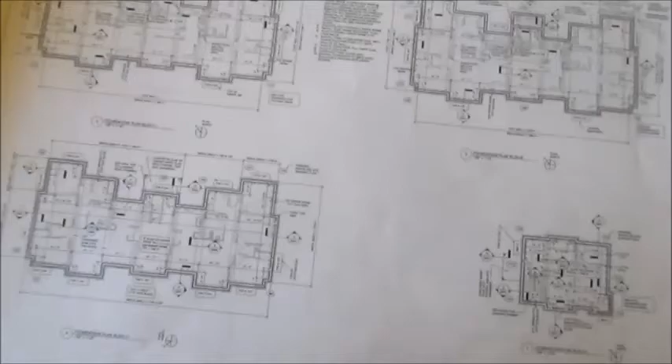We're going to continue to look at the structure of our Thurston Ave apartments. We are going to look at foundations today on page S101. Remember, S is for structural drawings, and these are the foundation plans for all 4 buildings. I'm going to run over here to the foundation plan for building C.

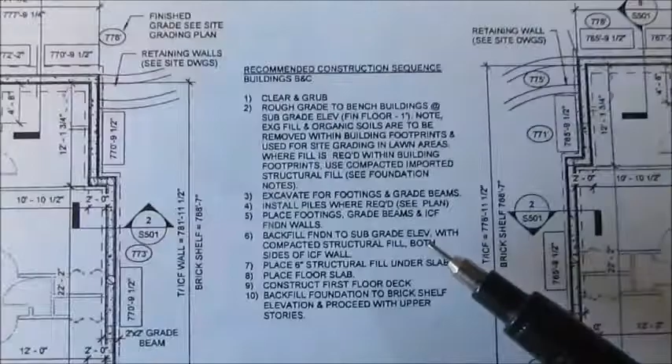Just to the right of that, there's a whole bunch of words explaining to the contractor how to go about excavating and backfilling. Excavating means we're digging holes.

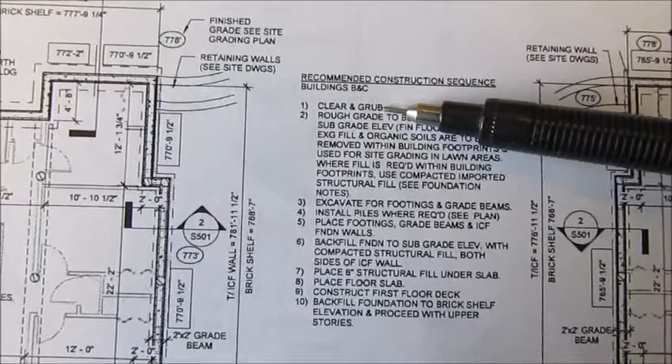Backfilling means we're filling in around the building. First, clear and grub. That means we're going to cut down any trees or other bushes, shrubs, any vegetation that's there. We're going to clear that out. Grubbing means we're getting rid of all the roots and other organic things in the ground. We want to get rid of all that because setting a building on top of something organic, eventually that'll rot and the building will sink.

Next, rough grade. That means basically kick around some dirt, dig a hole, get it close. This tells us to take our buildings and go down 1 foot, and we'll look at this further in a cross section, but we're going to over dig our buildings.

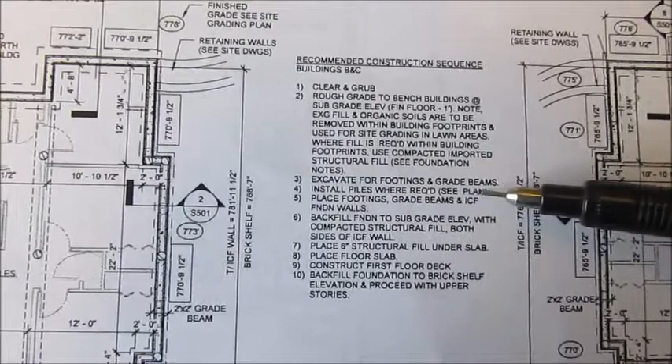Next, we're going to excavate for footings and grade beams. We'll look at what a grade beam is today in a section. Next, we're going to install our piles. Remember, those were the great big wooden telephone poles we're digging into the ground to give additional support for our structure. We're then going to backfill and get it close to grade.

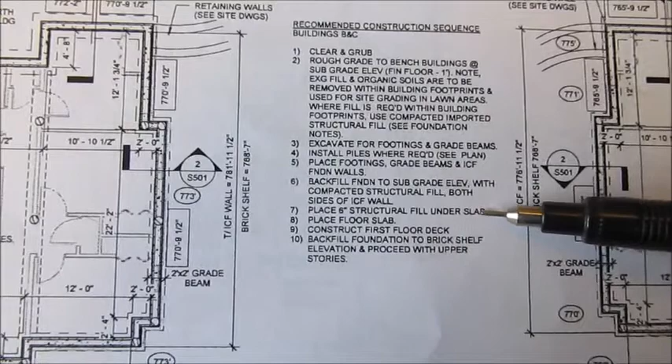We're going to place all our structural fill. Structural fill is material that does not have organic material in it that's 3 inches in size or less. It could be dirty, it could be gravelly. As long as it's 3 inches in diameter or less, it's okay. That's based off specifications in the specification manual for the project.

Place floor slabs. It means we've graded for all of that and we've put in our floors. Next, we're going to create the first deck, which is the first floor of the building, not the ground floor, but the first floor. Then they're going to backfill the foundation.

So we're going to go to page S501, again, which is structural drawings. We're going to look at sections 3 and sections 9.

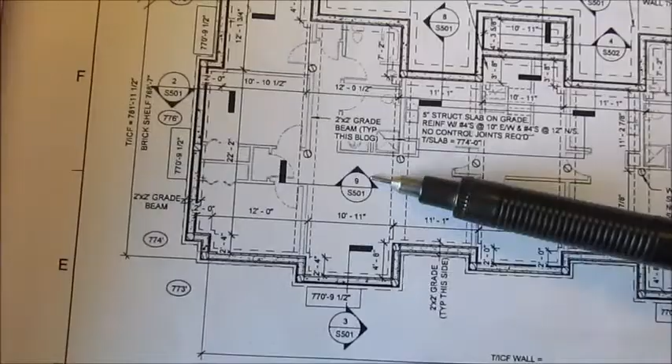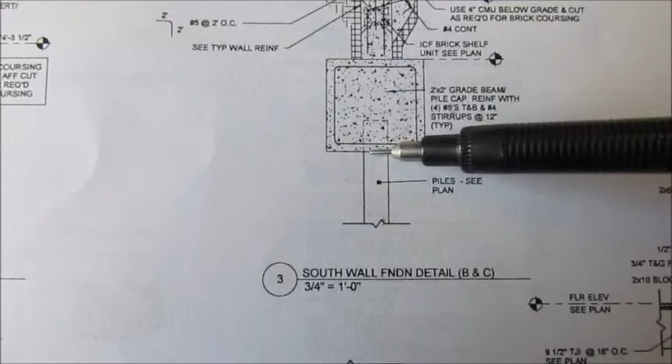So here we are. We've moved over to drawing S501, which is our foundation details. We're going to start by looking at section 3, which is our south wall foundation. You can see this is for building C, the building we were looking at. The construction sequence suggested that we dig out for our grade beams and footers first. So this earth, and remember we're looking at this at the end, the earth would have been dug to here.

Then we drive our piles. Then we form up our grade beam. This grade beam is 2 feet square, so we're looking at the end. This is the end of the grade beam. We've cut through the building. The grade beam has to be 2 feet by 2 feet, so this makes a perfect square. It has to have 4 number 5s, top and bottom.

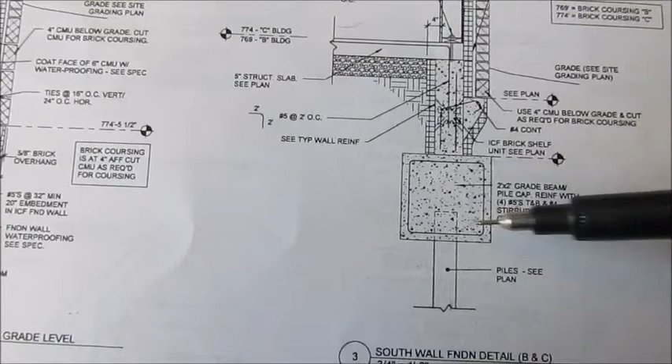Now remember, that's a rebar spec, number 5s, based on 1/8 of an inch, so it'd be 5/8 of an inch rebar. Top and bottom, that's the T and B, so there's 1, 2, 3, and 4. We'll see this better on another section in a second. And then our number 4 rebar, which is 1/2 inch diameter, 12 inches along the length of that grade beam. So you see one here, and then the next stirrup would be 12 inches away. It would either come at us or away from us because we're looking at the end.

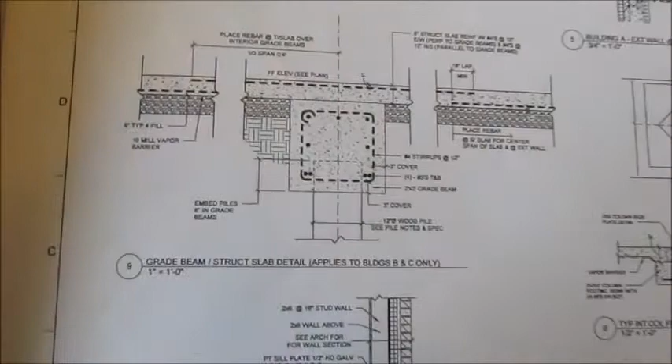If we go over here to section 9, we can see this a little clearer. We can see this one's a little different because this has more rebar in it, but in the previous example we had 1, 2, 3, and 4. As you can see, there are actually 2 here. They're shown as 2, but it's still giving us the same note. So this would be something you'd contact an engineer about and ask, are we going with 4 or are we going with what you're showing here, which is 6?

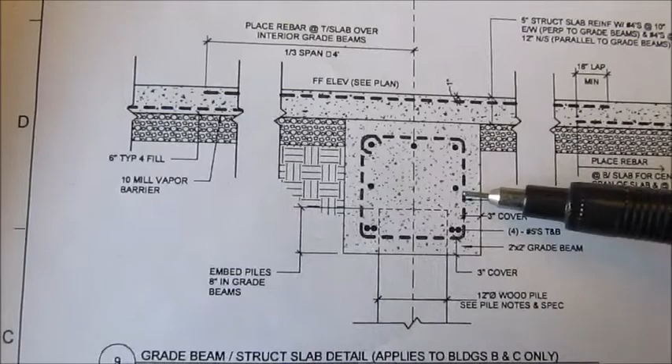In addition to that, you see 2 more here, and again, that would be a great conversation to have with the engineer to make sure that as you're doing a project like this, we put the right amount of rebar in this grade beam so that we meet the specification for how much that has to hold. If I come back over here, we can see that after that, our foundation continues up through, and that's going to be in the next video.